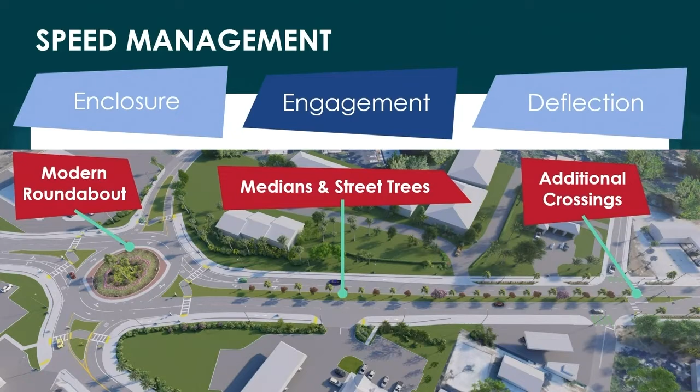And lastly, deflection. Deflection can be a horizontal or vertical movement of the driver. Some ways we can do this are raised mid-block crossings that force the drivers to slow down when crossing over them. It also raises their awareness of the pedestrian crossing, brings that pedestrian up higher into their eyesight. Again, the modern roundabout, great tool with the circular geometry that forces drivers to slow down as they navigate through the intersection.

So our Florida Department of Transportation Design Manual and the Traffic Engineering Manual that we use have either been updated or are in the process of being updated to match this new safety-driven approach that we're taking.

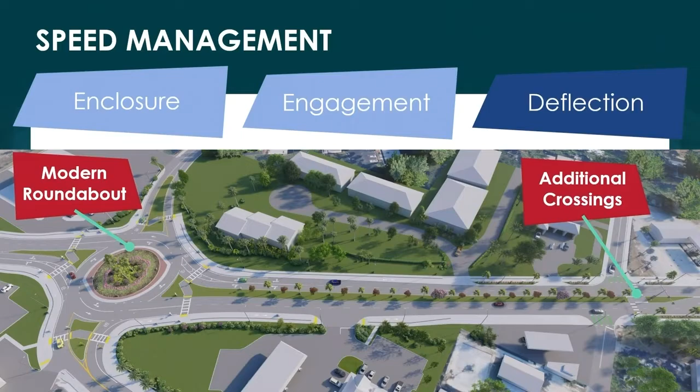So the majority of the rest of the presentation is going to be on some projects that we've actually been able to incorporate these speed management techniques and tools.

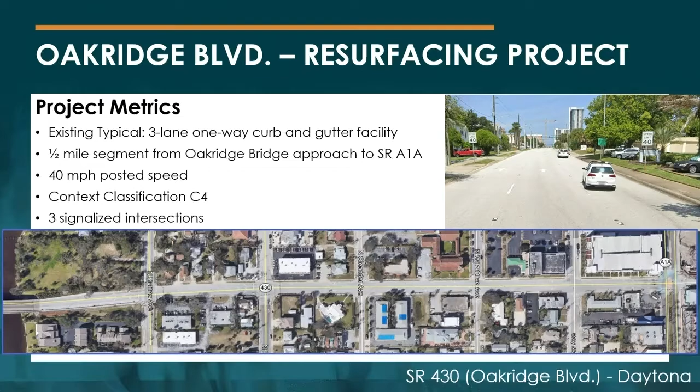The first one is Oakridge Boulevard in Daytona. This is an existing 3-lane, one-way curb and gutter facility, a half-mile segment from the Oakridge Bridge approach to State Road A1A, currently posted at 40 miles an hour with a context classification of C4, meaning a tight grid network, high pedestrian traffic, lots of residential and businesses in the area. There are 3 signalized intersections today within that half mile.

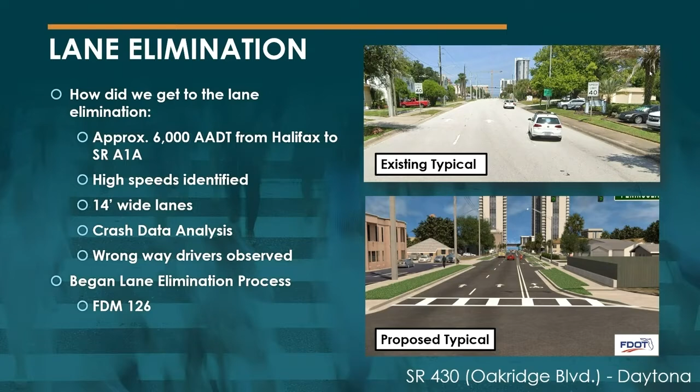This started as a resurfacing project. There's no such thing as just a resurfacing project anymore—every project has the opportunity to improve safety. So this resurfacing project turned into a lane elimination project. It was 3 lanes one way, and we reallocated some of that pavement width to modify the typical section so that it was better suited for all users, going through the lane elimination process that's now provided in the FDM.

So some of the complete streets and speed management techniques we were able to put on this job: we lowered the posted speed from 40 to 35 miles an hour based on the target speed, and everything else we incorporated lends itself to actually achieving people driving at 35 miles an hour. We put in curbed islands, which allow us to move the curb line in to get that tighter feel while still maintaining the existing outside curb line so we could have minimal drainage impacts. We also put in low profile landscaping, bulb outs, bike bailouts where we had to end the bike lane, and 3 new mid-block crossing opportunities.

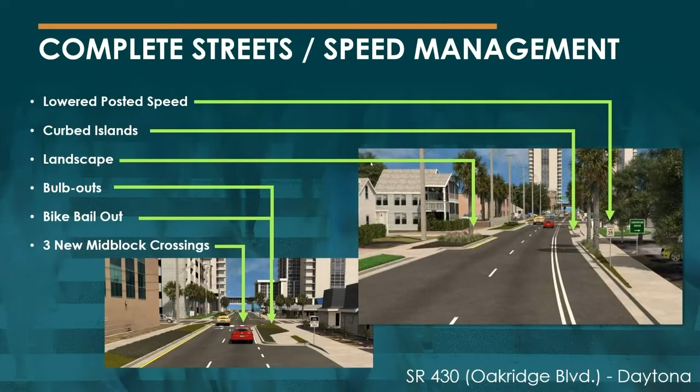The lane elimination in itself was a speed management technique. We reduced the lane widths to their necessary widths to meet criteria. We put in a 7-foot green protected bike lane along this facility, so there's a physical barrier between the outside travel lane and the bike lane. We also added some horizontal deflection, one of those fundamental concepts for speed management. This project is currently under construction and will be complete next month.

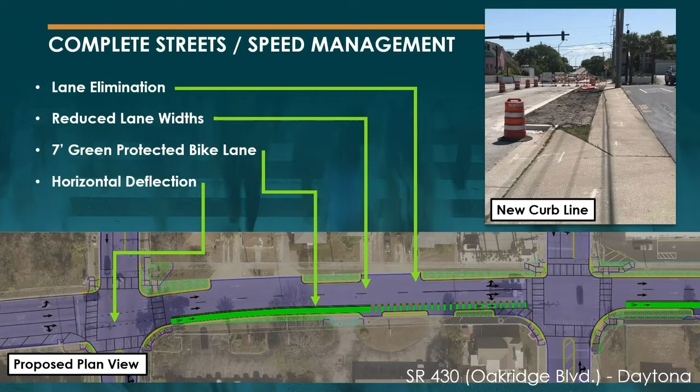The next one is Orange Blossom Trail, or OBT, in Orlando. This was a safety improvement project—a 6-lane curb and gutter divided facility, a 1-mile segment from Holden Avenue to 34th Street, posted 40 miles an hour, with that same context classification of C4, with 3 existing mid-block crossings with PHBs, or pedestrian hybrid beacons, and 12 existing LYNX transit stops. The characteristics of this corridor include a combination of low income and multifamily housing, high transit use, and attractors and generators for peds and bikes on both sides of the road, along with very high volumes of vehicular traffic.

This 1-mile segment was identified as the most dangerous roadway in our district for bikes and pedestrians. Now, OBT has undergone a big transformation over the last 13 years through a multi-phased approach.

First, crossing opportunities and connectivity for pedestrians were enhanced in 2007 through the installation of 3 mid-block crossings. In 2012, we placed a raised median along the project. This was followed by a drop in the posted speed from 45 to 40 in 2014, and lastly, in 2020, we added those PHBs, or pedestrian hybrid beacons, at the 3 existing mid-block crossings.

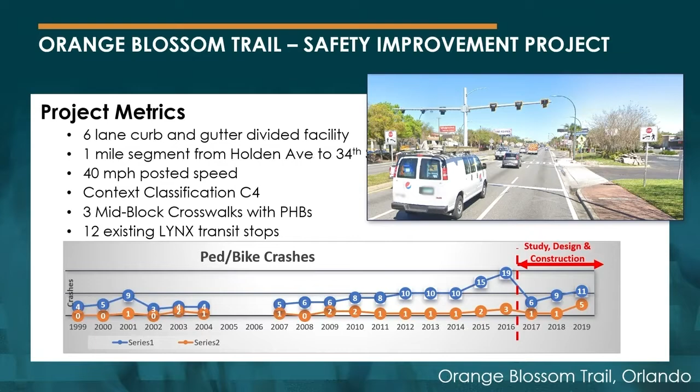You can see from the graph that bike and ped crashes have been climbing regardless of the safety improvements we were installing, and we needed more drastic measures to be taken on this road. So we were tasked with developing a project that puts bikes and peds at the forefront by using all of the speed management tools we had available. Every improvement on this project encourages drivers to travel at slower speeds, while also encouraging pedestrians to use this facility properly and safely.

Excuse me, can you back up one, please? Yeah. Real quick, Series 1, Series 2, what's that?

So it's the fatalities and the serious injuries for bikes and peds. The blue would be the serious injuries, and the orange is fatalities. Got it, thank you very much.

You're welcome. So it is 40 now. What was it before? Prior to 2014, it was 45. With this project, we'll be dropping it to 30.

The PHB mast arm in the median offers a spot location sense of enclosure. It's a large vertical element that acts as a sort of gateway or tunneling feeling to the drivers. The fencing in the median is another vertical element which causes drivers to feel enclosed slightly, but that wasn't the primary purpose of the fencing.

The fencing's purpose was to channel pedestrians and encourage compliance with designated mid-block crossings. The last enclosure element is the landscaping, which provides drivers with a sense of vertical friction, as well as discourages pedestrians from walking and staging at places in the median that aren't designated crossings. We actually chose landscaping that would be uncomfortable for a pedestrian to cross through - prickly bushes and things they might try once or twice, but be less inclined the next time.

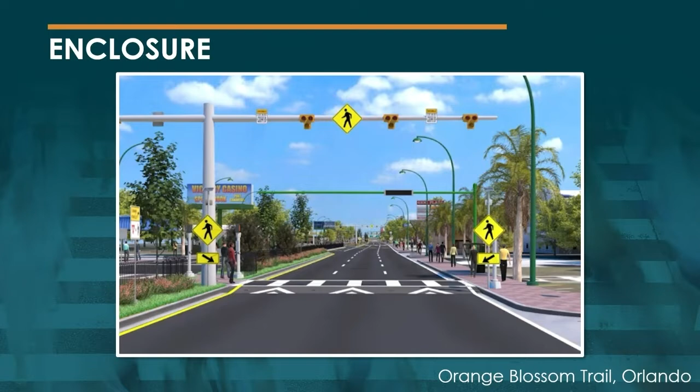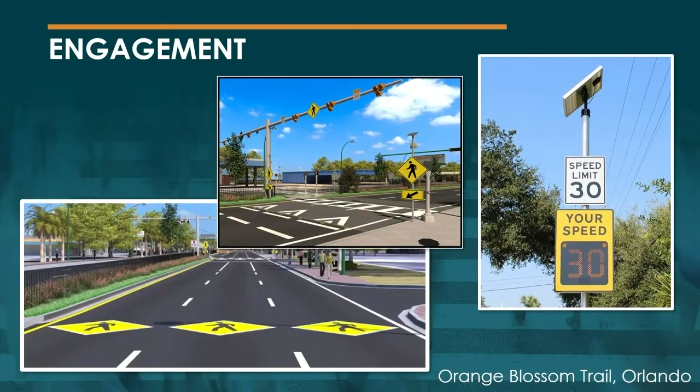For engagement, we have the pedestrian hybrid beacon, which acts as a pedestrian actuated signal at all of the mid-block crossing opportunities. There were 3 existing on the project before we started designing; we're adding 3 more for a total of 6 within the 1 mile. We also have advanced crosswalk pavement markings, in-road lighting at all of our crosswalks, speed feedback signs, and landscaping in the median. All of these elements work together to keep the driver's attention on the road and changing elements without overloading the driver with too much information.

Last, we have deflection. Our crosswalks incorporate both types of deflection. We had very tight right-of-way constraints on this project, so we could not put in chicaning or horizontal deflection. Instead we incorporated a sort of faux horizontal deflection through our striping. The standard travel lane widths on this job, from inside to outside, were 10 foot, 11 foot, and close to 12 feet. Within the influence of the crosswalks, we squeezed that down to 10-foot lanes across the board, with extra pavement width for shoulders, but still through the striping, a sense that your lane is narrowing.

The crosswalks, as you can see in the picture, have a vertical deflection through the raised crosswalk. Both of these design elements deliberately give the driver a sense that they are deviating from their normal path of travel, which prompts a lower speed.

For these raised crosswalks, it was important that we coordinated with the transit agency on locations. We worked together to relay links where we were able to place the crosswalks and what our design constraints were, and together we made modifications to both our locations to fit their needs, and they made some relocations to fit our constraints. We also designed for their specific bus type accommodations, ensuring the bus's wheelbase would be able to stage solely on the table and never have to straddle the raised transition, so it would never be awkward for people getting on and off the bus.

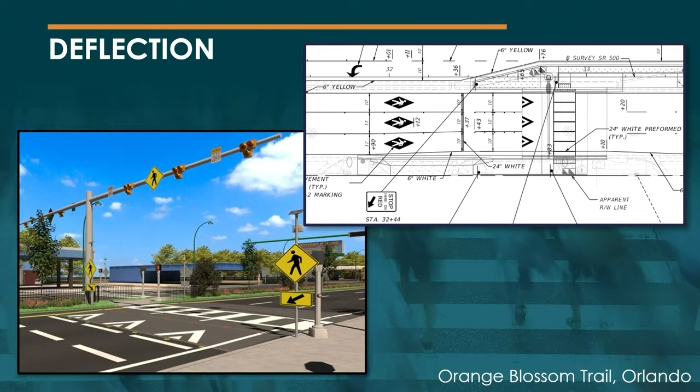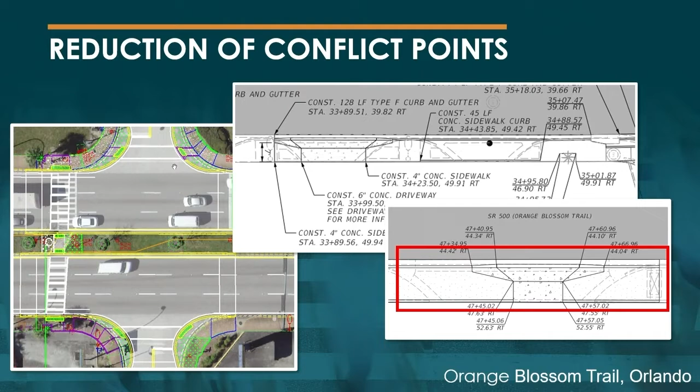Here's a summary of all the safety improvements we were able to put on OBT: fencing, LED lighting, PHBs, 3 additional mid-block crossings, in-road lighting, reduced radial returns, driveway consolidation, leading pedestrian intervals, hardened center lines (a way to extend the median nose at signalized intersections), speed feedback signs, reducing the posted speed from 40 to 30, relocating or consolidating transit stops, enhanced pedestrian crossing pavement markings. There was a heavy education campaign prior to construction that will continue through construction, an enforcement campaign, and landscaping.

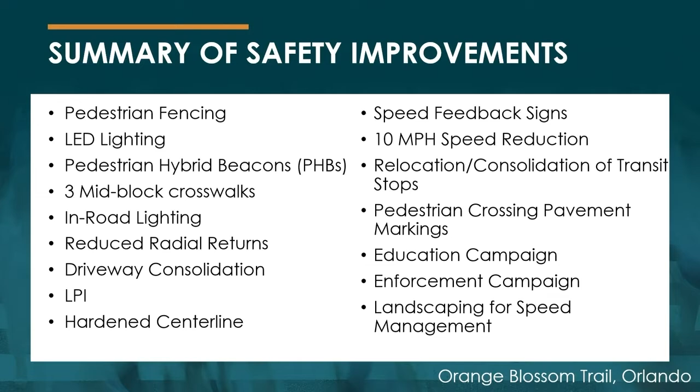All of which would not have been possible without heavy coordination and communication efforts. This included coordinating with the transit facility on mid-block crossing locations, property owners for driveway modifications, Orange County for signal retiming efforts, and the OBT Development Board on speed reduction to make sure it was still in line with their vision for the corridor.

This gets a little into the weeds about the construction side of this project, but I think it's an important piece. When an FDOT project goes out for contractors to bid on, they get a breakdown that looks like this of all the pay items on the job summarized into categories based on work type.

So asphalt work, drainage work, signal work. This is important because it gives the contractor a general scope of work before they start digging into the plans. And because a contractor must be pre-qualified in at least 50% of these work types to be eligible to bid on that job by themselves without going into a joint venture with another contractor. That's a Florida statute they have to follow.

So in October, we let the job, all excited, and we got zero bids back. Very disappointing. After a little digging, we realized the way the categories had been divided up only gave us 12 eligible contractors in the entire state, most of which were not in Central Florida. So we went back to our categories and determined how we could shift those pay items around to get a more balanced contract.

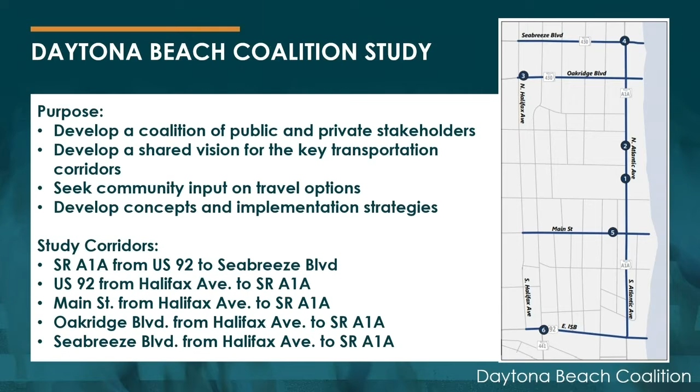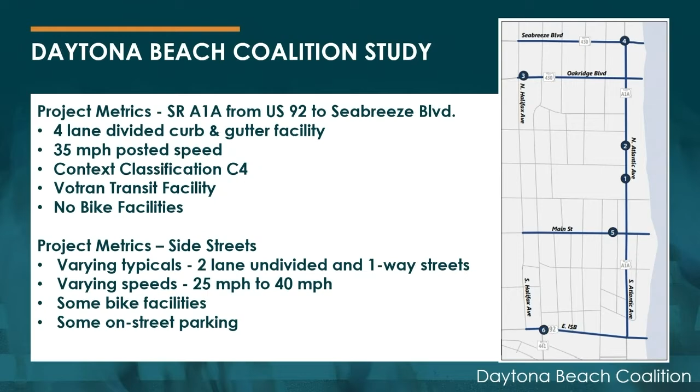To give you a visual of what those corridors look like, State Road A1A in this section is a 4-lane divided curb and gutter facility, currently posted at 35 miles an hour, context classification of C4, with VOTRAN facilities and no bike facilities. The side streets range from 2-lane undivided and one-way pairs, varying in speed from 25 to 40 miles an hour, with some bike facilities and some on-street parking.

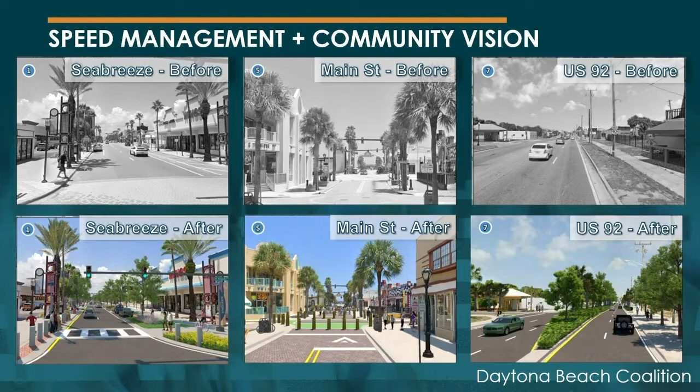All right, so this video is a little long. I'm going to see if I can try to jump around.

All right, so we've got the raised crosswalks, some of the chicaning in there, so we alter that center line alignment.

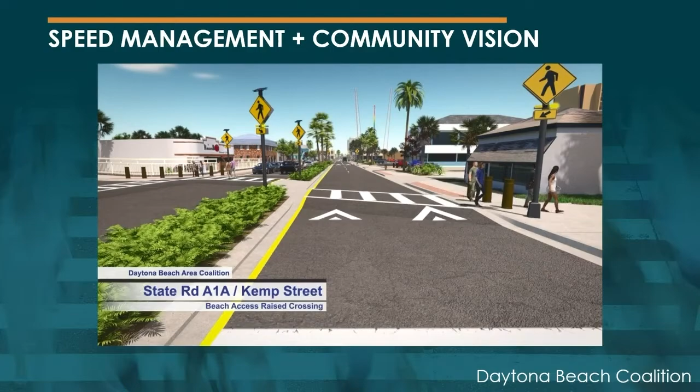This was an existing mid-block crossing. Along the job, we put in another raised crossing. You can see we've got those triangles, that's the striping that alerts you that there is going to be a vertical deflection happening.

And we've got the landscaping in the median, some low profile, high trees, all Florida native, all done in coordination with the local stakeholders that ultimately will be maintaining that landscaping.

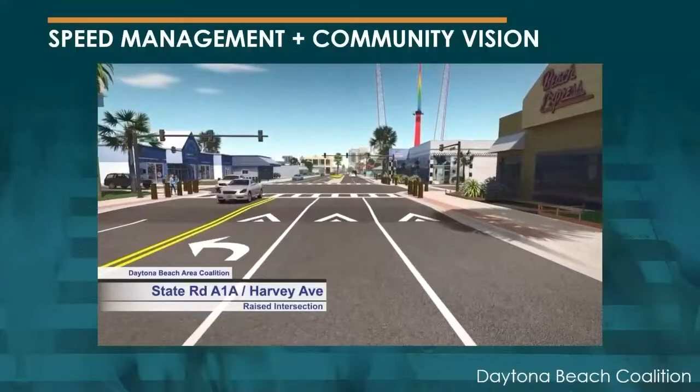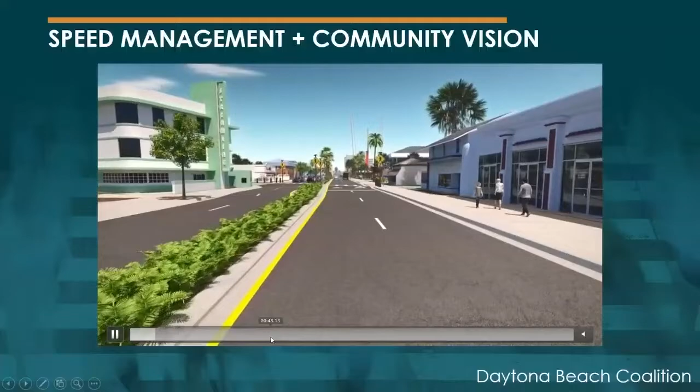Feels like you're speeding. A little bit of speeding. Got it on double time.

Okay, so I'll pause here. This is one of those, oh, come on now.

There we go. All right, so this is one of those raised intersections. So unlike the raised crosswalk that just comes up and down over a short period, this is plateaued through the entire intersection. You can see around the curb returns, it basically comes up to full curb height.

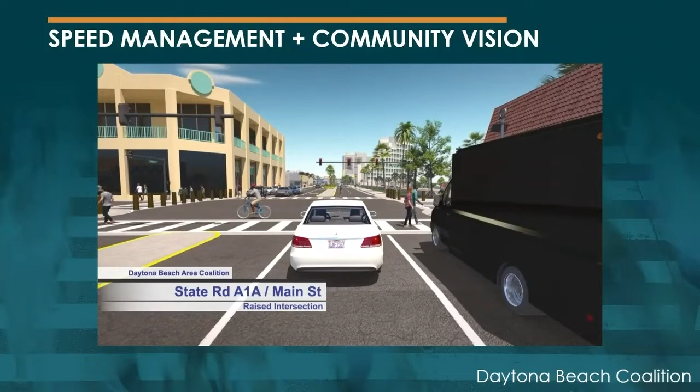So we've got those bollards around the returns to protect as a barrier for our pedestrians waiting to cross. And then on that left-hand side, you can see those bollards right here. So we have retractable bollards that you can use for a couple of different things. In this case, A1A can use them for special events whenever they want to close down a leg of the intersection and just have it closed off for vehicles and only used for pedestrians.

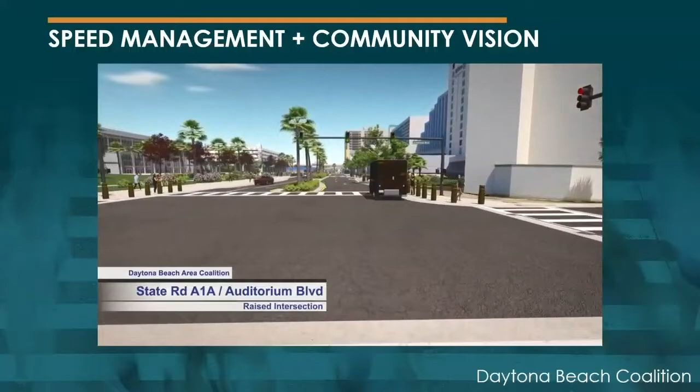And it's going to be a lot more of the same. I think Lorene mentioned consistency and redundancy is also important. So there's a lot of that on this project.

Driver expectation and everything is also important. So you don't want to throw too much at them all at once. We've got decorative pavers in there.

So I wanted to point out this too. These circles in the pavement, those are those retractable bollards that we can use for a few different things. So this is a pull-off area that could be used for transit or truck deliveries. There's a lot of deliveries along this road. You don't want them having to load and unload their truck in that outside lane, backing up traffic. So these can be put down whenever a bus needs to come in or a delivery needs to happen. And then when they're done, you can put them back up.

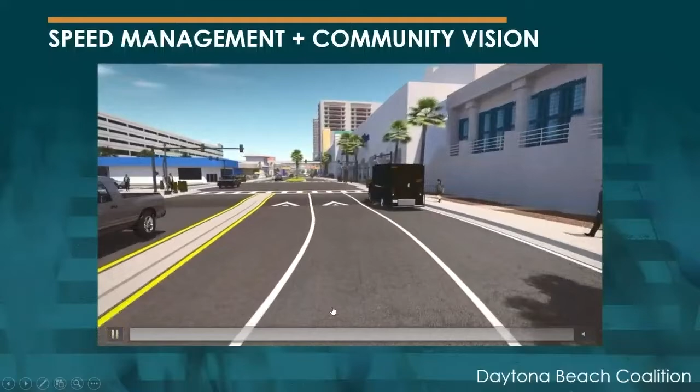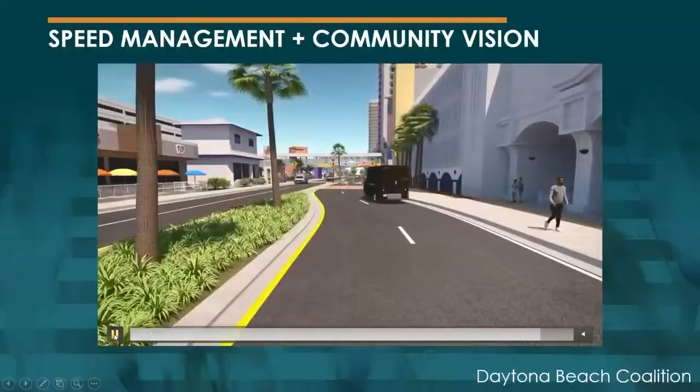I'll show another one here in just a second. More chicaning. All right, and right there, so no deliveries, no buses. We've got the bollards pulled up, provides a wider space for the pedestrians to walk at that time.

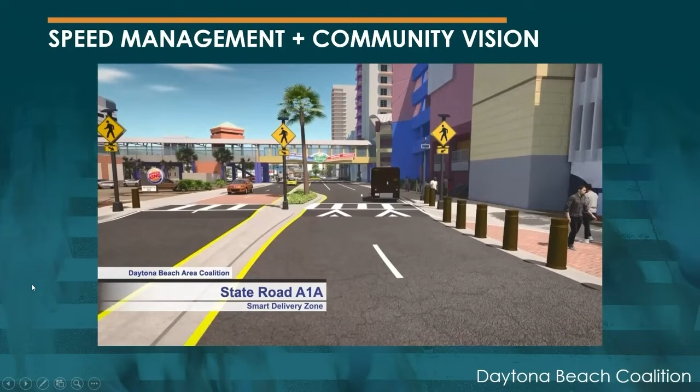And then these are all of the stakeholders that were part of the Daytona Coalition that worked together to make this project happen. This first segment of A1A that was in the video is going to go to construction next year.

And with that, I'll take your questions. Feel free to direct your easy questions to me, and Lorraine said she'll take the heavy hitters.

Thank you. I have a question about maintenance. So with all of these safety improvements, the cost of maintenance appears that it would be higher than what it is now. Is the department looking at that?

It's definitely a factor, and I think that's why we are talking about bringing in the stakeholders as early as possible, whether it's the landscaping, the pavers, the bollards, the signal upgrades. We recognize that when we leave and construction is done, that is going to be on you guys. So it's really just about working together, and you tell us what your needs are, what your challenges are, what your concerns about those upgrades, and I think we just have to work through it on a case-by-case basis. But yes, it's absolutely a consideration.

Thank you. Pete, I'm coming to you. Well, I'm coming to Pete. I want to ask you a question. What has to happen for the bollards to go up and down?

Who has to talk to who, and that kind of thing? That is the one question I was hoping I was not going to get. I wasn't on the coalition, so I'm not sure what research was done. I had the same question.